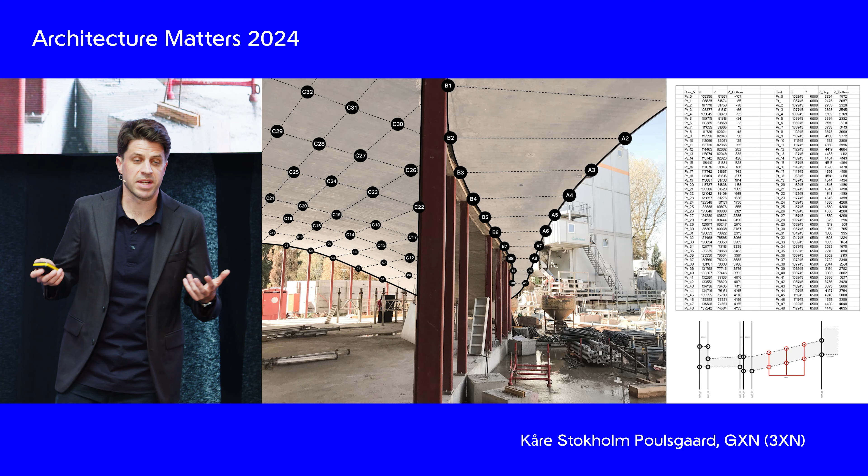When it came time to construct this, the engineers were looking at the casting of that little concrete lip you can see coming down there, and they were worrying about the precision of it. Rather than dealing with that themselves, they had a lot of back and forth conversations, kicking it back to us and asking if we could help do quality control on the construction side and the construction models. The team could do exactly that, because they had that skill picked up from research in terms of how to segment and work with complex geometries and exchange data in a way that could benefit the larger project. Here's the building once it was done.

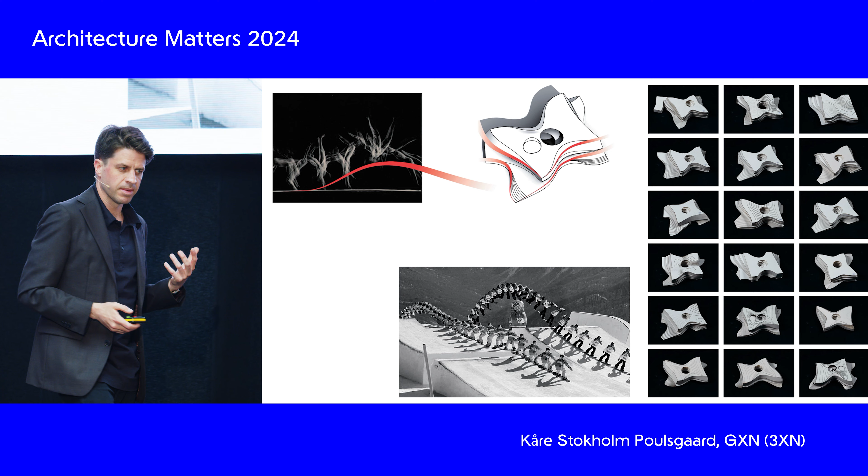There's another interesting story about this. The IOC headquarters was designed with the aim of embodying the values of the Olympics and the IOC. It has this sort of motion of an athlete, movement of an athlete in motion. But nowhere is the idea of embodying the values of the IOC more tangible than in the atrium of the building, where the central staircase is literally the Olympic rings falling down through the building.

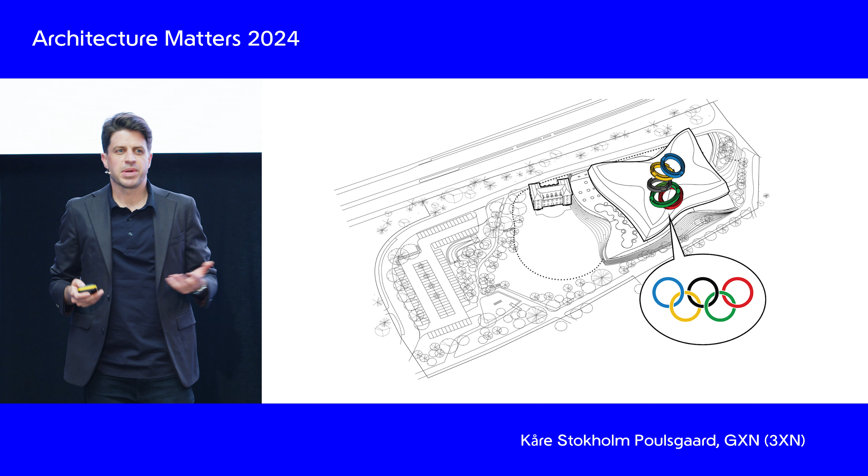Those stairs were designed based on a lot of different things, but part of what found its way into that design was knowledge from work carried out between 3XN and GXN, going back and looking at our buildings.

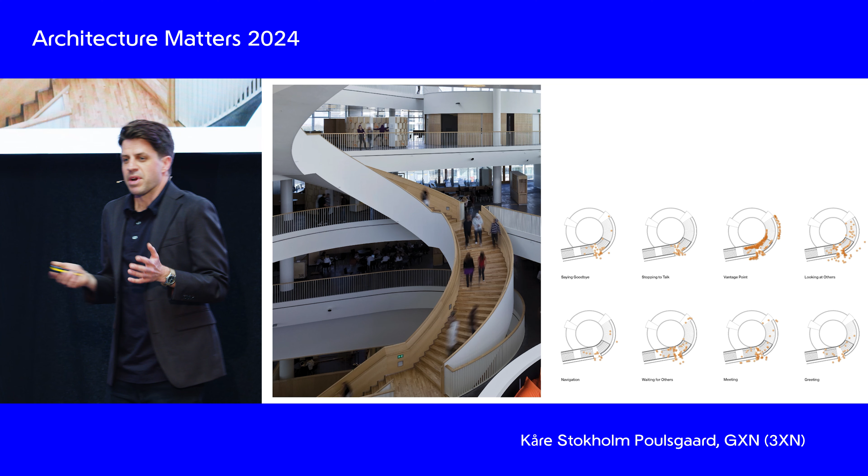I'm an anthropologist by training. When I first got into architecture, I was absolutely floored when I realized that architects rarely get to see the buildings with people in them. It's an absolutely fantastic thing to think about - you spend 10 years, so much work on something, and there's not really anything in the model that allows you to go back and evaluate the buildings and actually talk to the people. I'm sure people do that and want to do that, but it's not in the business model itself.

So we prioritize going back to our own buildings, and we prioritize going to other buildings as well to understand what happens in them. One of the things we did to get really geeky and nerdy on this was a PhD collaboration, where a PhD spent 5 years working in the office just drilling in on 3XN staircases, trying to understand what happens on them.

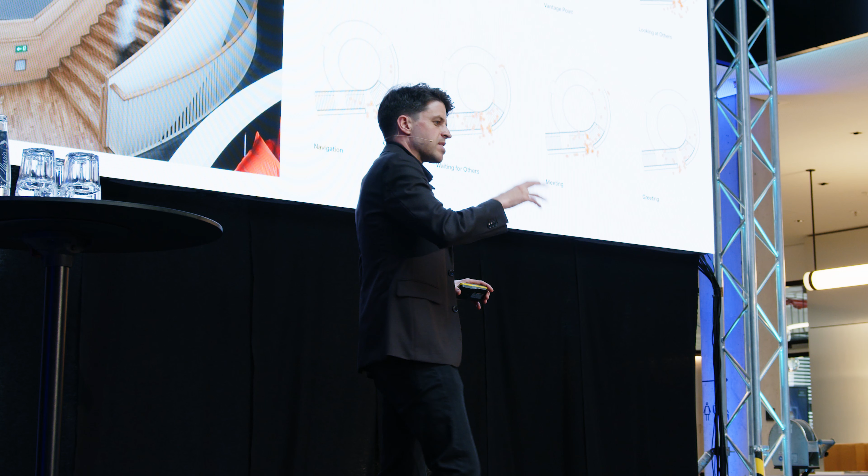3XN has a saying: stairs connect more than floors, they can become social spaces. Through the research of this PhD student, we could indeed see all the different types of social behaviors happening there, but also just how important something like the landing was. For example, if you meet somebody on the stairs while walking up, you might have to go your own separate ways when you get to the landing if there's nothing there for you to sit on.

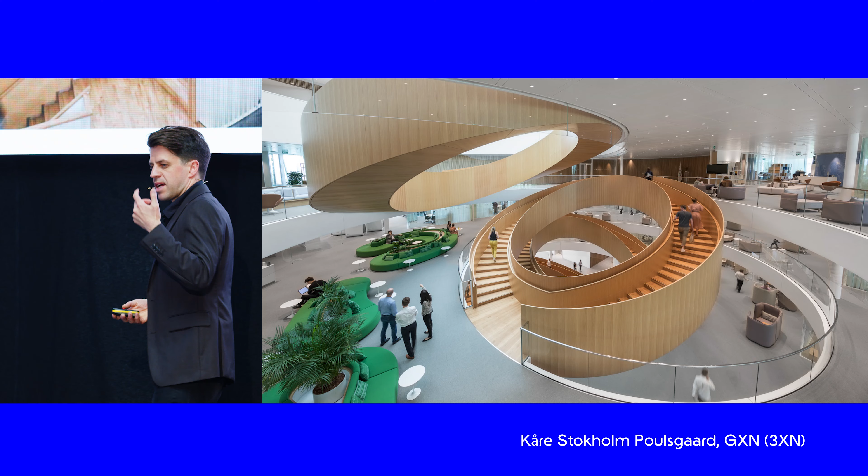So a simple insight like that could inform the stairs of the IOC building, where the stairs have been pushed around so that the landing space becomes as long as possible. You need to walk around so you'll meet more people, and there are these social pockets where you can sit down and actually do something.

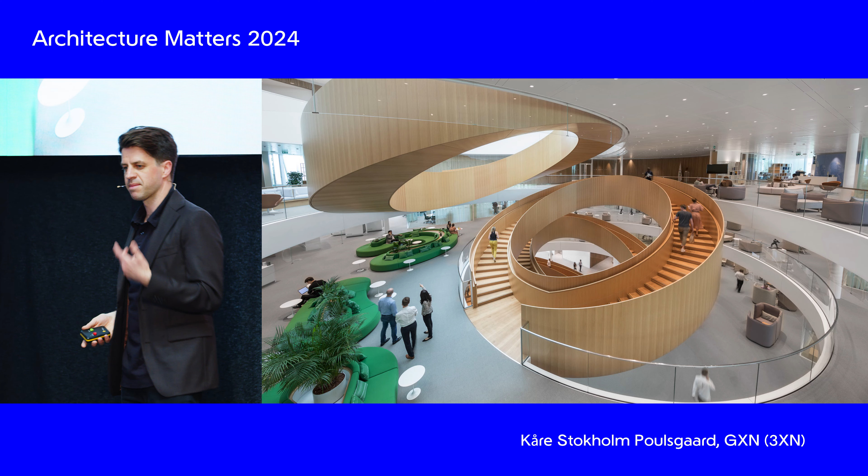So I think there's one way of thinking about the work we do between 3XN and GXN - that notion of experimenting then scaling is probably one way to look at it.

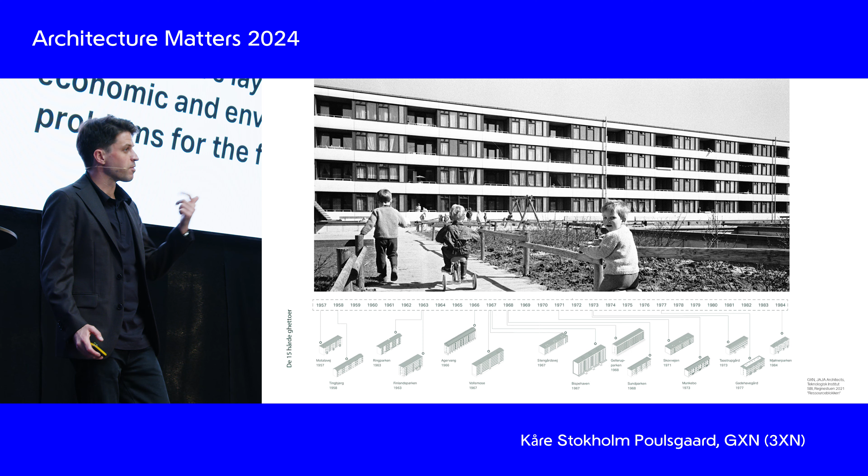And he wasn't wrong. His idea and solution, which you probably heard, was to come out with the notion of long life, loose fit, low energy. We could add least carbon, high flexibility to that. But this notion of just focusing on cost and industrialization, which we've also heard about, has created some challenges.

We have a lot of these housing complexes in Denmark, as I'm sure you have here, and as I'm sure you have in a lot of other places. I have a bit of a soft spot for social housing projects like these, because they came in post-war and actually helped build up the welfare state in many of the countries where this was happening.

Creating housing for a lot of people, putting them into these places, making sure people had better options than what was there before. But of course, they also created a lot of problems, and the industrialized way they were built meant that a lot of these buildings were built very quickly.

In Denmark, we know now that we're going to have to tear at least 1.3 million square meters of this type of housing down over the next 10 years because it's not working, basically, for various reasons. It's a challenge, and it's probably a shame to tear this down, but it also represents an opportunity.

One of the key challenges when we're looking at the circular economy, which I'll get into a little bit, is understanding what is already in the buildings. We know next to nothing about what is in the buildings already out here around us. And within the regular project cycle, we don't have the time to figure that out and understand the quality.

And understand what to do with it before the building has been demolished. Well, here in Denmark, we know that we have 10 years, 15 housing projects, 1 million square meters that are going to be torn down. And so we wanted to see if there's a way to work with this.

We also know, when we looked into it, that they're all built from the same techniques, the same materials, using precast concrete elements at industrial scale. And so we wanted to do, in this research project, a deep dive on 2 case studies.

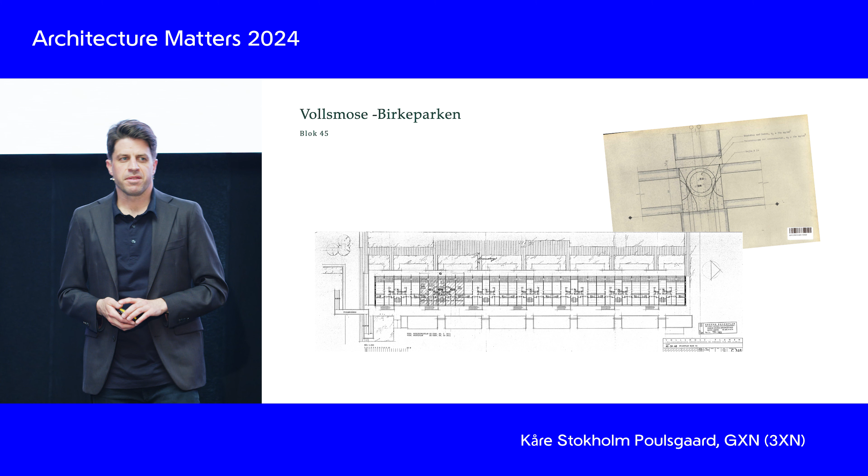This is one of them, so it's seen better days, certainly. Figuring out what we could find in documentation, understanding the construction system, understanding the concrete elements, how many there were, what quality they were in, doing testing of the concrete, testing the strength, testing whether there were dangerous materials.

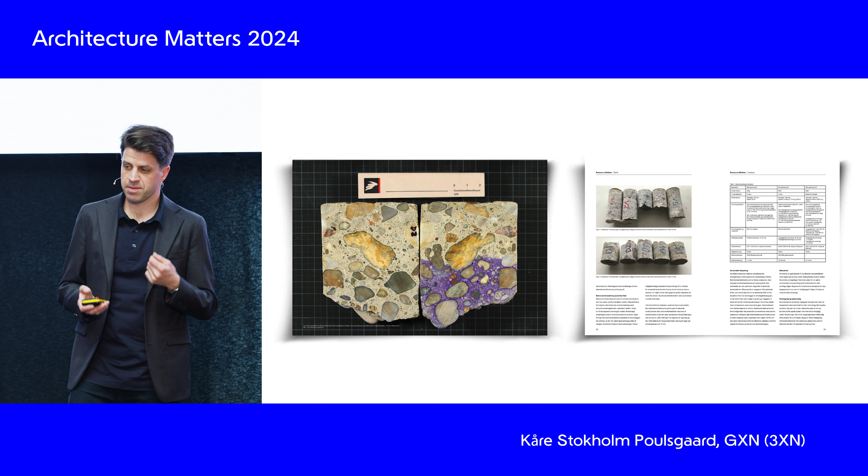It was strong enough still. There wasn't any dangerous materials.

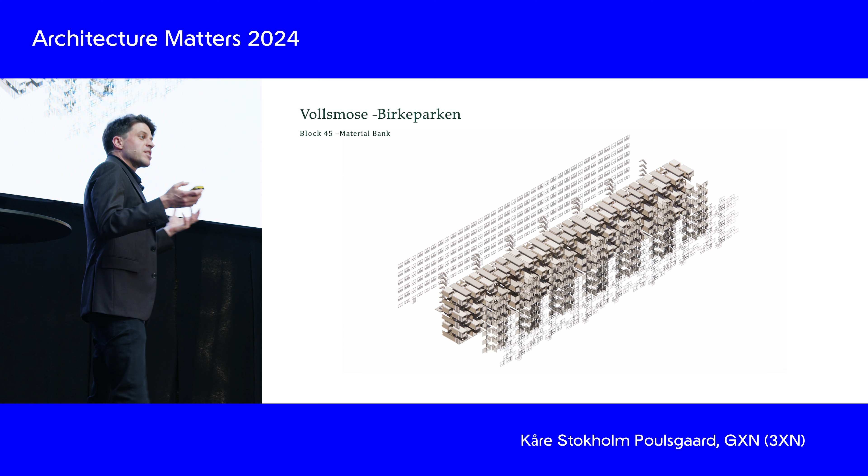Thinking about it architecturally, if you were to take a building like this apart, what sort of Lego blocks might you get out of it? That's all right, we got to mention, we're from Denmark, we got to mention Lego once in a while. But taking the buildings apart, what sort of blocks might you get out? What might you do with them?

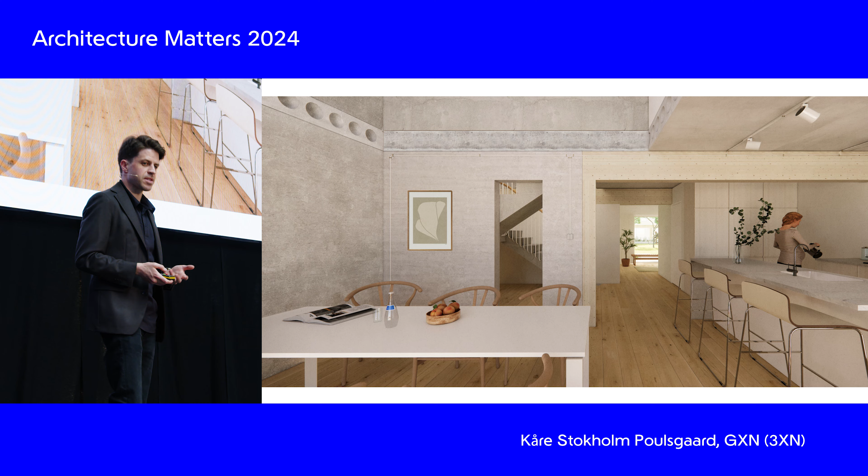We did a design competition then with a couple of companies in Copenhagen. 3XN participated in looking at how you might put these blocks together in new ways, creating new types of houses, new types of systems that could incorporate existing concrete elements.

And then we were life cycle assessing it, understanding what are the actual savings in terms of carbon by doing this. So this is all nice, but of course we wanted to scale this up.

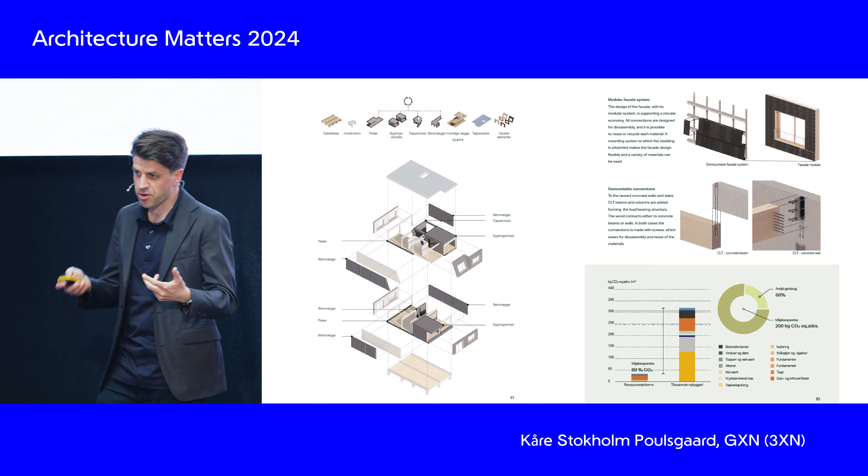We've then been working in another research project with the whole value chain in the construction industry, figuring out what it means to actually start by harvesting these things and getting them all the way into the built environment. And so we've been working a lot with demolition contractors.

One thing you tend to forget, I think, working with the circular economy, is that it's about moving materials from A to B, and sometimes that is the difficult part.

We spent 2 years trying to get some concrete elements out of demolition projects. The challenge on demolitions is that you can add cost, but not time. The building has to be down by the time it's down.

And so we were standing there with a pot of money saying, hey, can you cut this out for us, please? We want the elements whole. And they're saying, no, it's going to take too long, but I can probably just... And they were sort of doing that every time we came out, and there would be 3 elements left, and the rest would be broken.

But over time, working with some very good and very open demolition contractors, we actually found out that there are techniques these guys can use, and there are elements in the buildings that can be salvaged, while there are others they can't do. And so that's being put together now into documentation and a guide that can be put out to the industry.

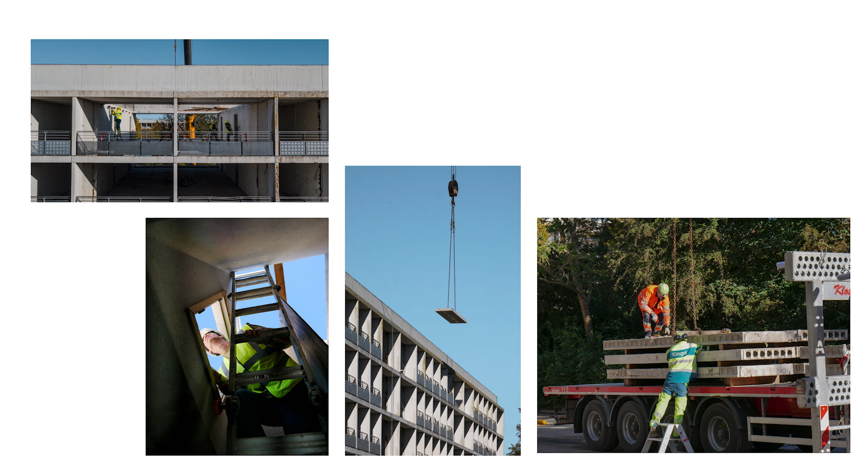And in this specific project here, we managed to salvage 42 elements, walls and slabs, that we were then testing again, of course, and testing new ways of putting them together, with different connections.

Right now we're working on two use cases for these. One, which is interesting from an architectural standpoint, is building them into our own architecture office. Another, more interesting from an environmental perspective, is working with a concrete material manufacturer in Denmark who will take these back, certify them, and feed them into a housing project being built in the area where they come from.

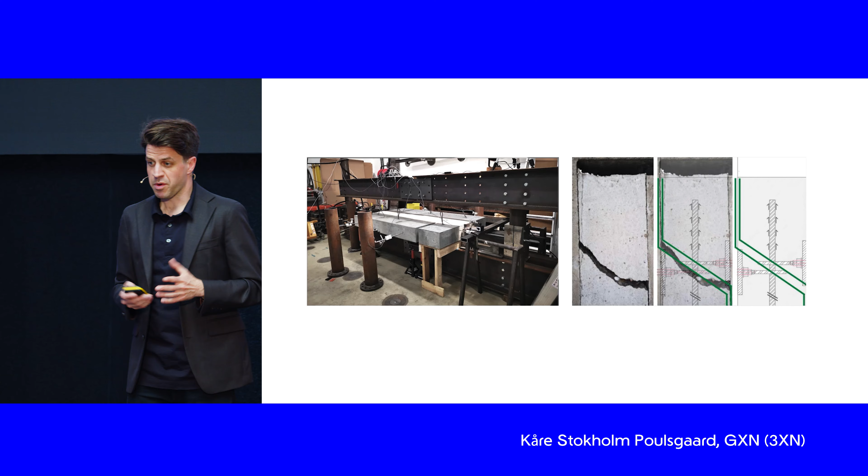So 3XN was doing that, and Torben from 3XN will talk much more about that in a breakout session. One of the things we did was actually build in the concrete elements, the decks, to show that this is possible. You run into a lot of engineers who tell you they're not going to sign off on that, and that's kind of what we're trying to figure out now at scale.

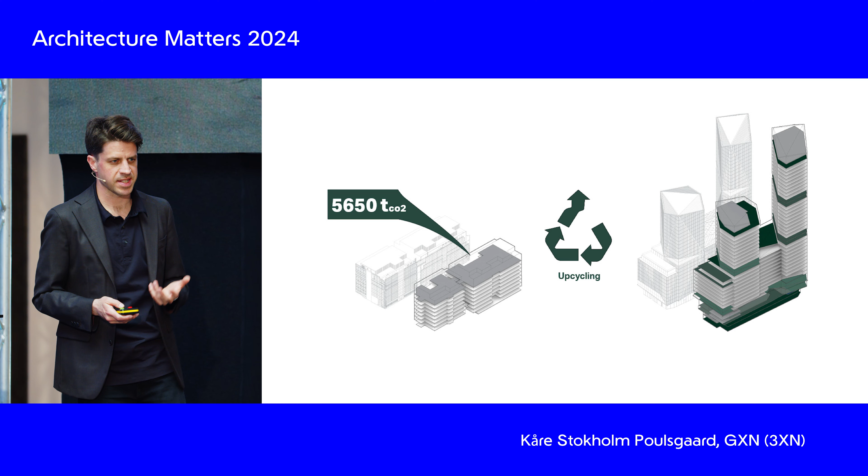At a whole different scale, a recent 3XN GXN collaboration is in London. This is 2 Finsbury Avenue. Here we're looking at the existing building on the site. We wanted to avoid situations like this, getting this waste out. We wanted to save the carbon that was in the materials. So what we're developing at the moment is methods for doing pre-demolition audits, understanding exactly what is in the building.

Understanding what the volumes are, and then turning that into what we call an upcycling catalog - a catalog of ideas that you can give to the developer and help them make decisions about what should happen.

One of the things we looked at here was the aluminum. The existing buildings had a massive aluminum facade, a lot of material going to waste there. We looked at the material properties and started developing design ideas with the 3XN team for how to integrate that into the project.

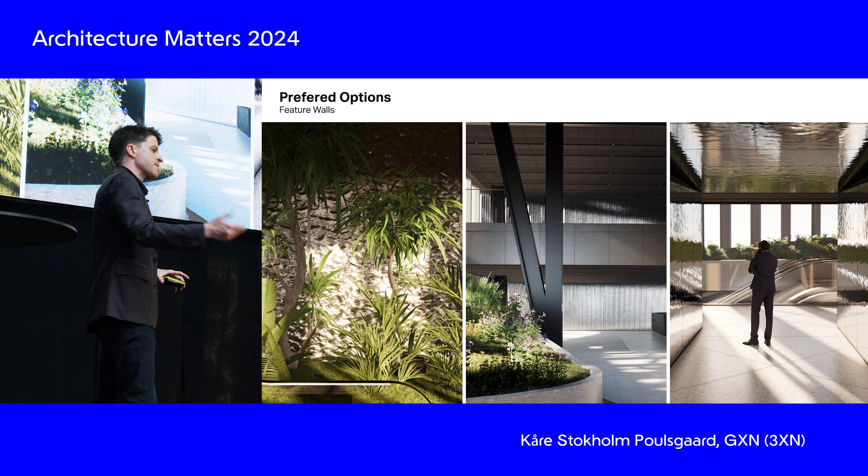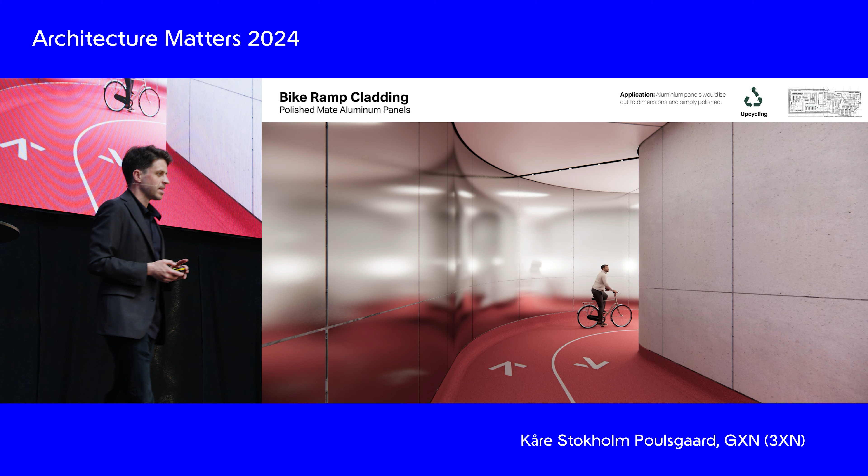We're also looking at lower risk stuff, like making the lockers that were needed down there with upcycled aluminum, doing wayfinding, and so on. So the client was keen to do something like this, but the challenge then becomes: well, what happens if I say yes? We had to figure that out, and that's kind of what we do in GXN.

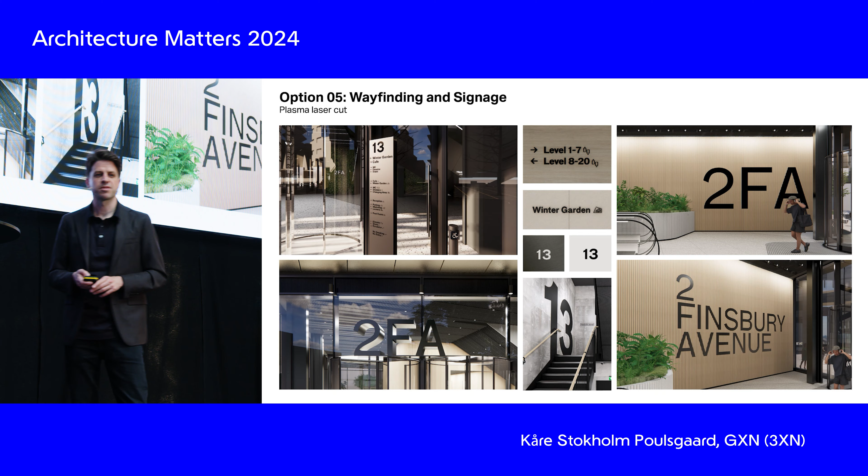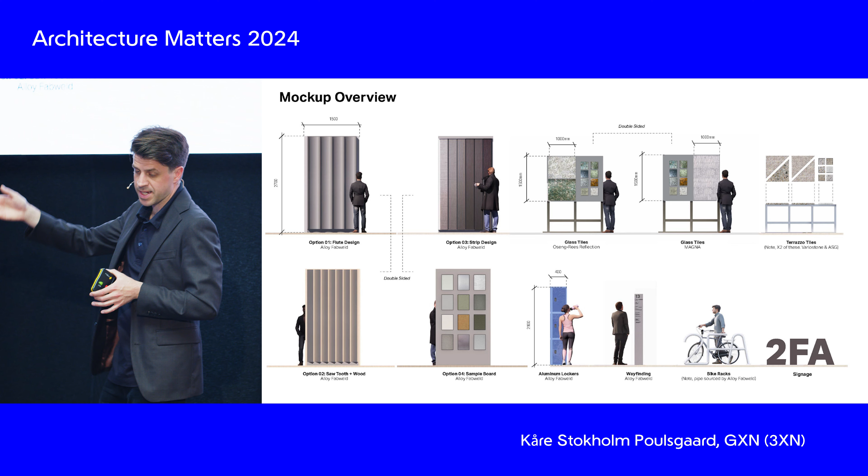So we spent some time finding a local manufacturer who could take the material in, remanufacture it, and who was willing to store it. We spent some time figuring out what sort of demonstrators we need to convince both the architects and the developer that this is possible.

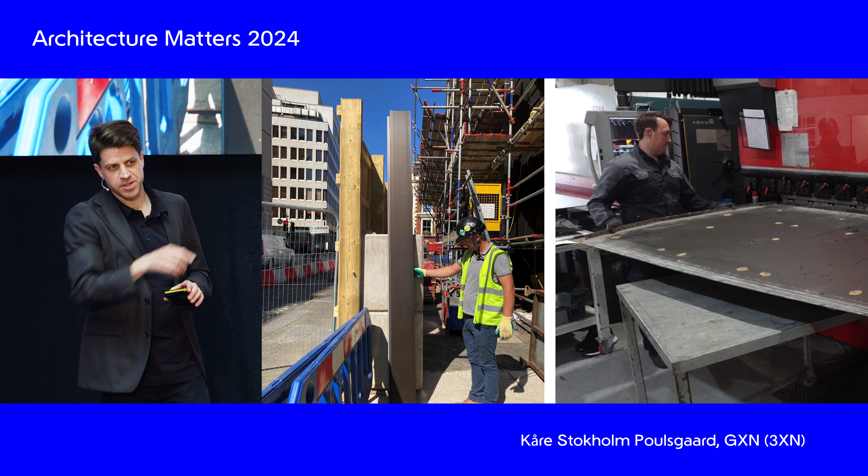We spent a lot of time convincing a contractor to get some samples of the building - that was another thing that was surprising, it takes 8 months to get 10 of those off a building for some reason. Having them remanufactured, creating the demonstrators, getting the client out there, everybody was happy, and we could press play on salvaging the materials, which we're now looking to get into the building.

What's interesting in London, and I know some of you are going to be talking about policy in the breakout sessions, is that they've been putting pressure on developers through this thing called a circular economy statement, where they're basically asking developers to understand the existing buildings and what to do with them when they're coming into a site. That's really changing the game.

Another thing we're seeing in London is that everybody wants the newest buildings, which means there are a lot of 20-year-old, 18-year-old buildings - interesting - a lot of unloved buildings. And the age for when a building becomes unloved is getting shorter, perversely, because everybody wants to be in a sustainable building now. So we're trying to figure out what we can do with the unloved buildings.

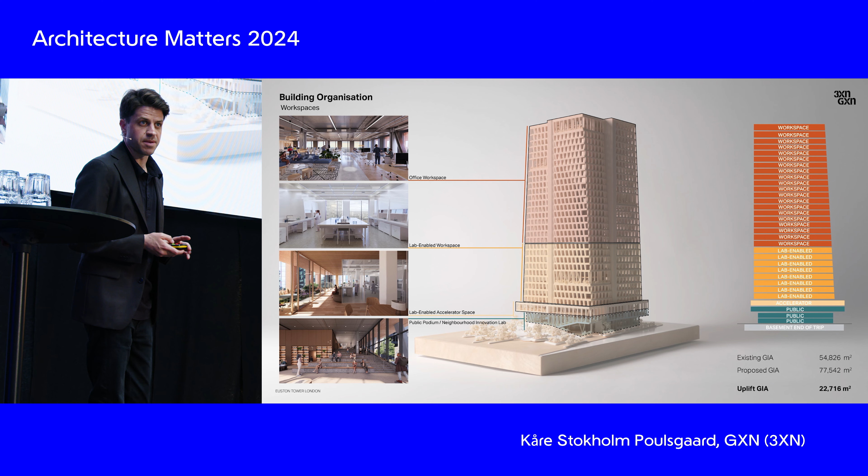It's in the Knowledge Quarter in London, so it needs to contain not just offices, but also laboratories, which come with their own challenges in terms of layout, vibration requirements, and floor-to-ceiling heights to get all the kit in. All this analysis is something we can start doing in GXN. This is where we wanted to get to with 3XN on this project, and this is how it looks today. So there's a little bit of space to come.

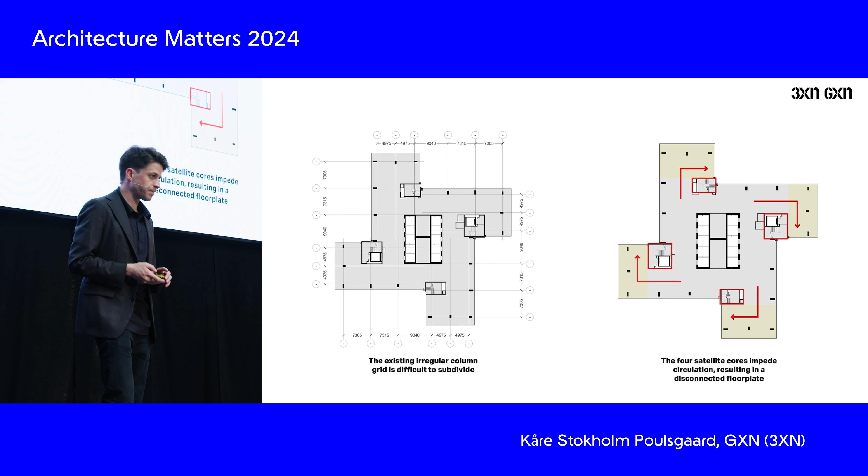Some of the challenges we can find through the analysis relate to understanding, if you look at it in plan, what to do with a floor plan like this. As you can see, it's very hard to do anything other than perimeter offices. It's very tricky to work with these satellite cores.

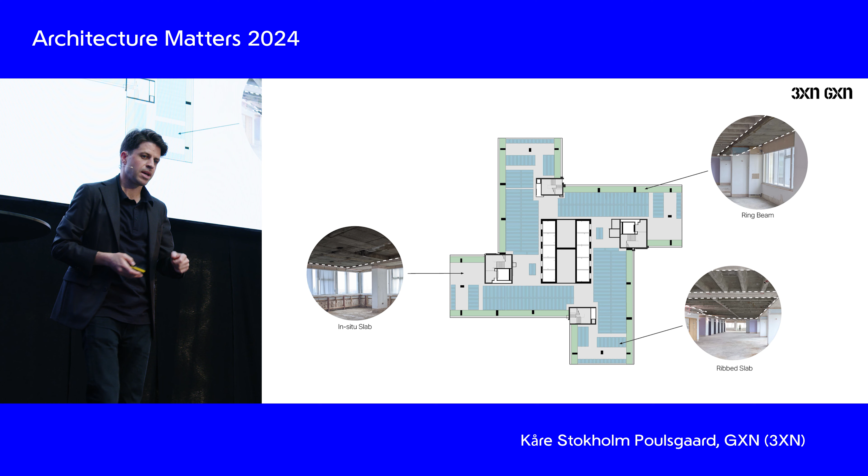The risers in the building were incredibly small. People apparently weren't breathing much in the 70s—you could probably blame smoking, I guess. But if you want to have labs in a building like this, you need large risers, and you need to start cutting the floor, which means cutting a lot of floor plate out all of a sudden, and you're losing a lot.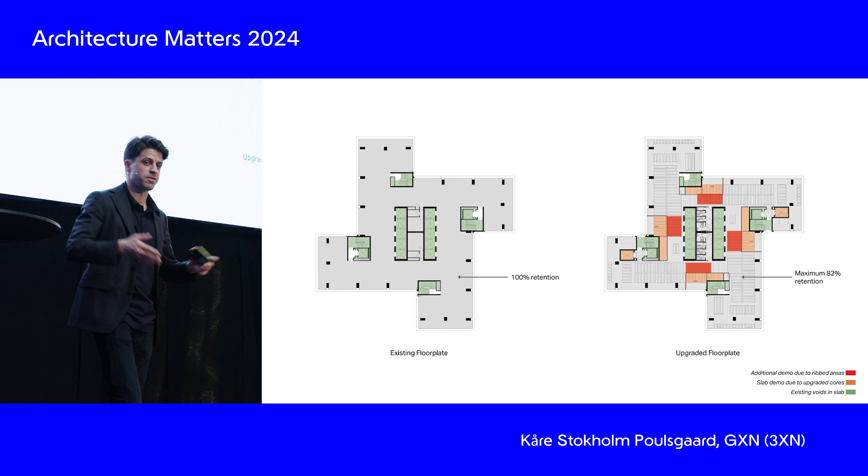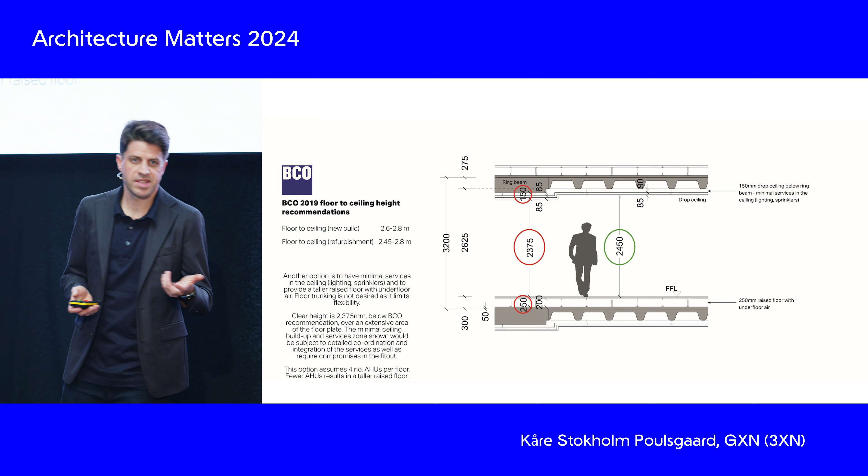Floor to ceiling heights are another challenge here. We went together with partners in London to see whether we could find any rented buildings with these floor to ceiling heights in London, and we were able to find 2. So there's a lot of discussion needed with the leasing teams in these organizations to figure out what to do, but this is basically a tricky thing.

Getting the documentation together for the building is another challenge. There were no drawings, no models for this. So we worked with Arup to get 300 cores drilled out of the building to understand the concrete and the steel. Arup also had to dig 30 meters down to understand where the piles were ending and how well they were performing, in terms of figuring out how much extra weight we could put on site.

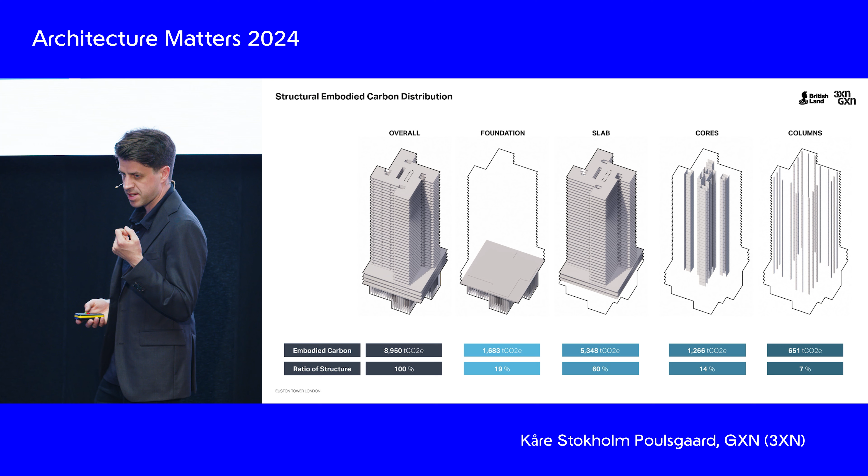From our side in GXN, we were doing a lot of analysis of where in the building the carbon was. The interesting thing here is that just saving the foundations and the cores will actually save you about 30% of the embodied carbon in a building like this.

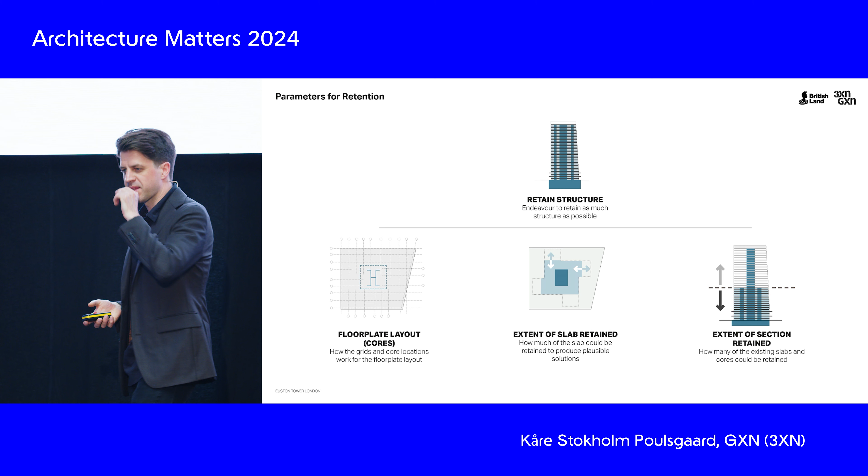And then there's a lot of work with 3XN, figuring out how to get this building into something that can perform. I think Torben will touch on this much more eloquently than I do. But the interesting thing I want to get across is that the building isn't obsolete because the materials aren't functioning in it a lot of the time.

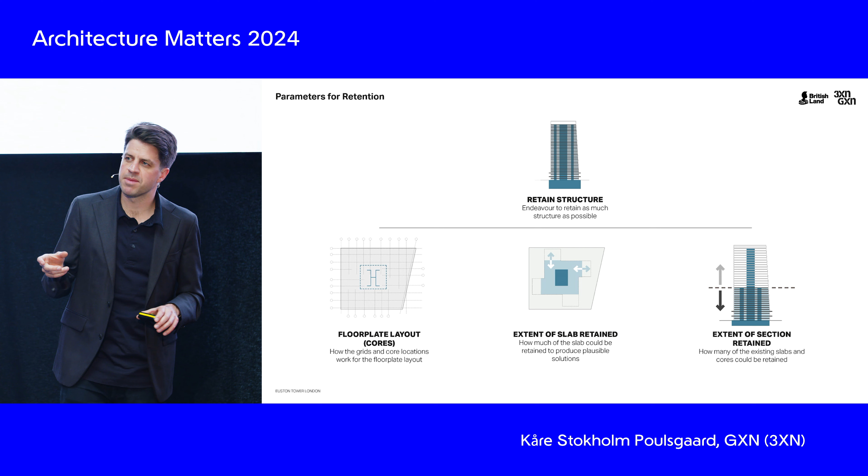It becomes obsolete because it doesn't function as a real estate asset. Whenever we undertake work like this, we have to take that into account, because it doesn't make sense to spend massive amounts of materials and carbon getting a building sort of there, only to have to do the same thing again in 10 years.

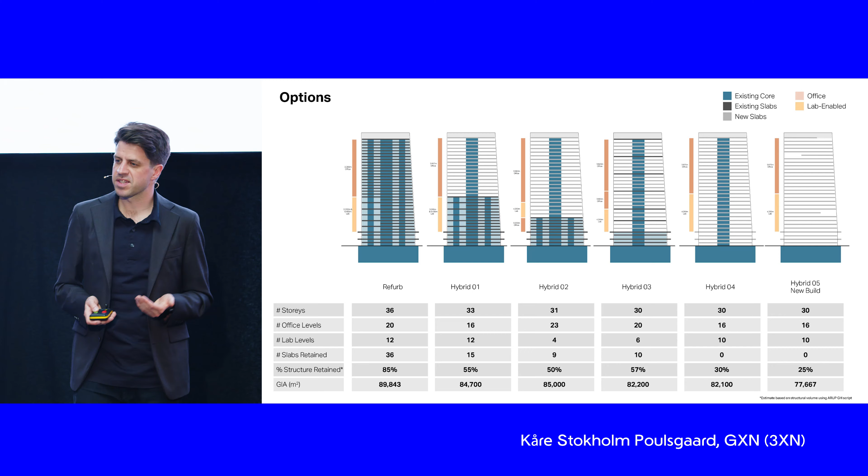So a lot of the evaluation we're doing in buildings like this is also about understanding how it performs, how it can actually meet tenant requirements, ways of doing the stacking and leasing and so on. All of these things have to come together to create something we can hopefully build and provide value. I think I'll stop there.